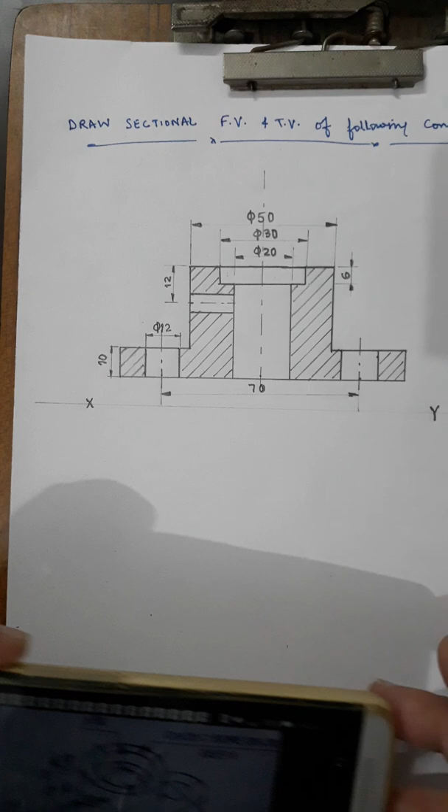Hello friends. Now in this video I will discuss the top view of this component. We have already done the sectional front view, and I have added this line, which will be there in the sectional front view. Now what is in the top view?

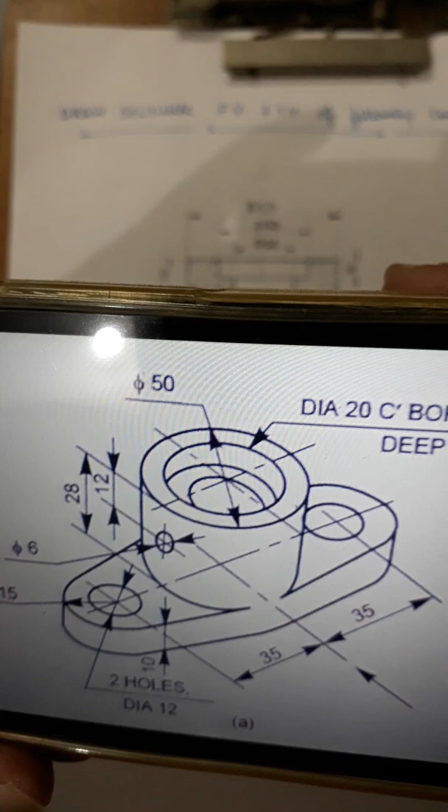You can see this is the component. There are three circles: dia 20, dia 30, and dia 50 at the middle. Two cylindrical holes are there on both sides, that is dia 12, and then radius 15 is outside.

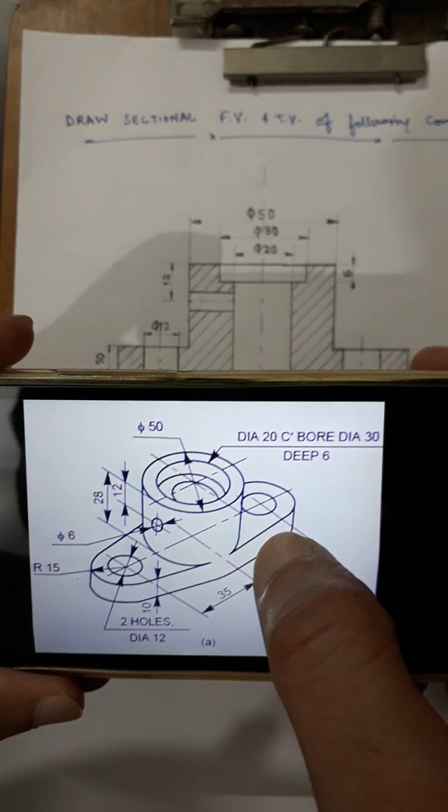Now I will be drawing the top view. First I will find out the center, by extending this chain line from the front view into the top.

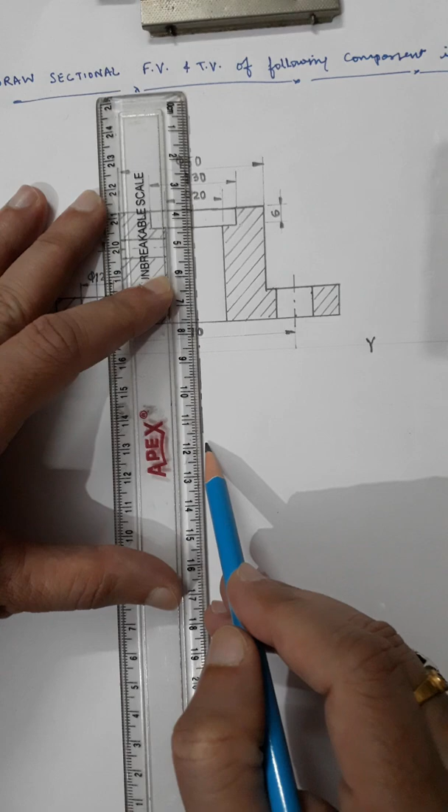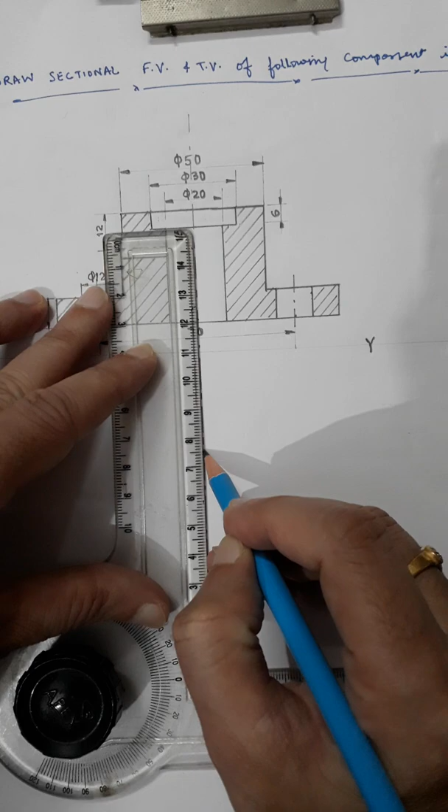Now I will be finding out the center. It is 50 mm, so the biggest circle is 50 mm, meaning 25 from here. You can take any suitable distance from the XY, say 10 mm and then 25 mm. So this is now I will be taking this as center.

Now again I am going to draw the center line, horizontal center line, both sides.

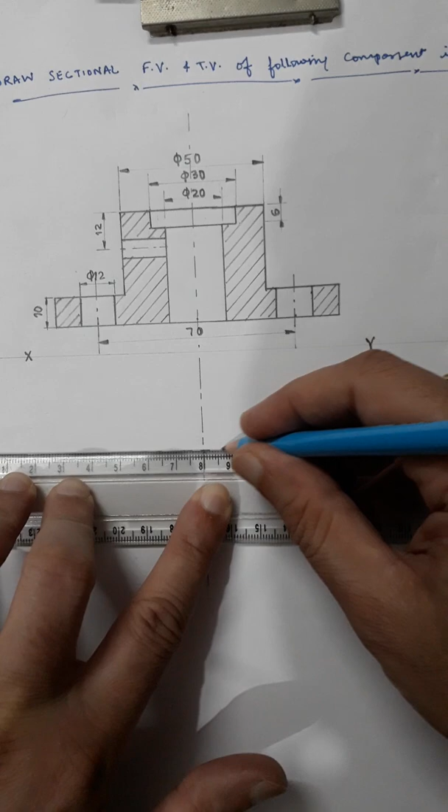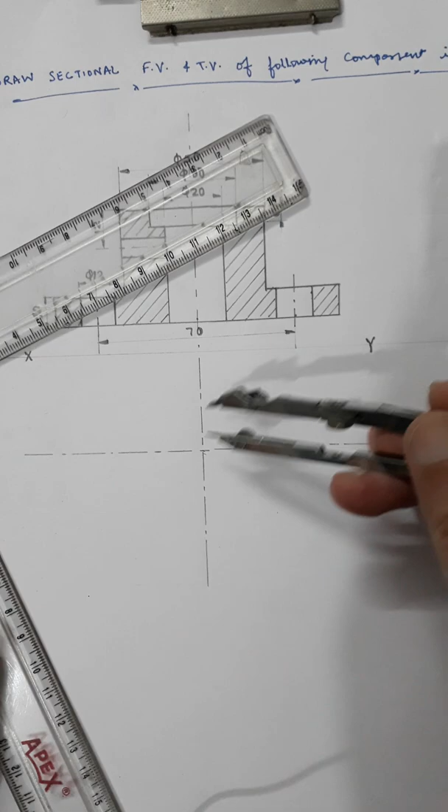Now I'll be drawing three circles: one is dia 20, other is dia 30, and the third one is dia 50. So this is dia 20, I'm going to draw.

And the second one is dia 30. I'm measuring 15 mm. So this will be dia 30.

And the next one is dia 50, meaning radius 25. And this is the outer circle.

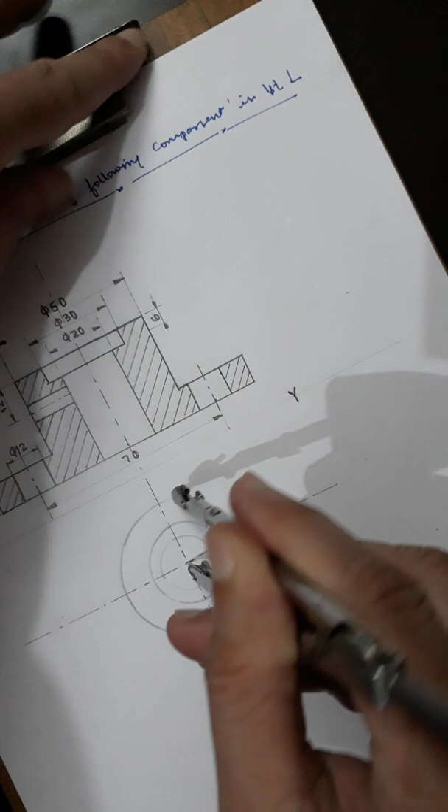Now these are the three circles, dia 20, 30 and 50. Now what is next? Now you can find out here.

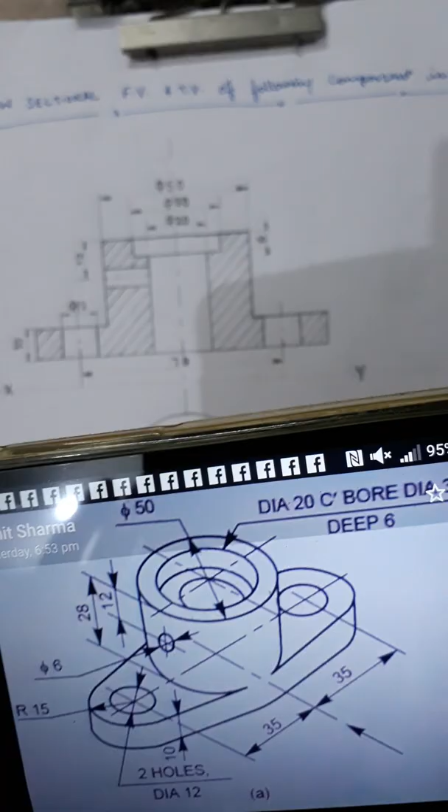So the distance of this center is 35 from the center of this component, 35 both sides. Now I will be drawing the center line first, both sides 35 mm each apart, and then I will be drawing the radius, outside radius. So here it is 35 mm both sides.

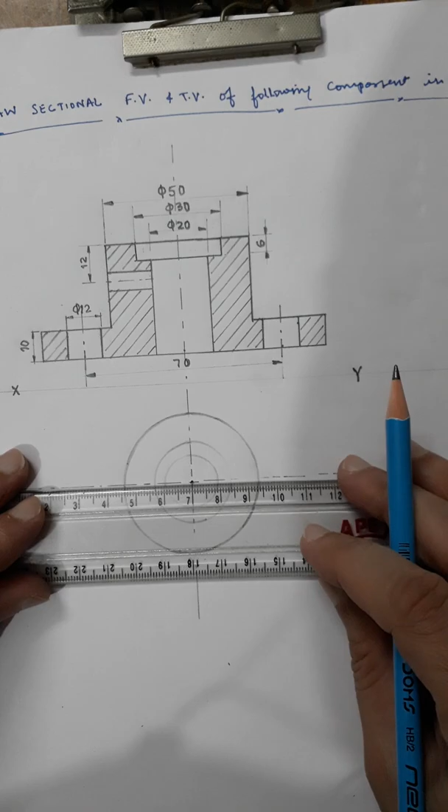I will be just extending it from this front view like here, so this is 35 mm, and it is on the other side as well. I am just extending it from the front view, the same center line.

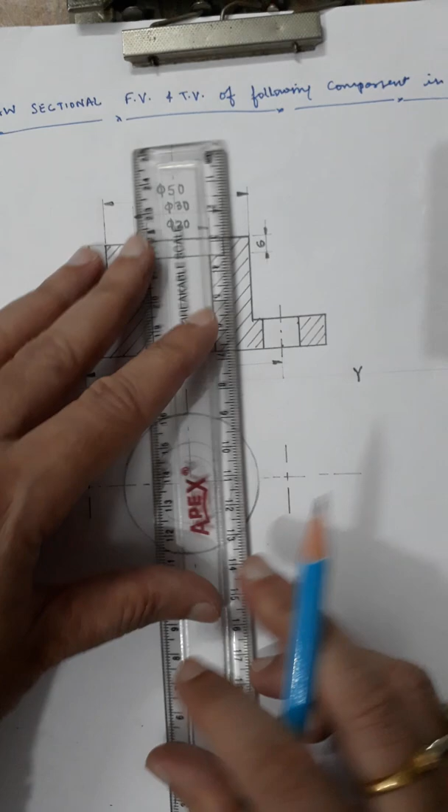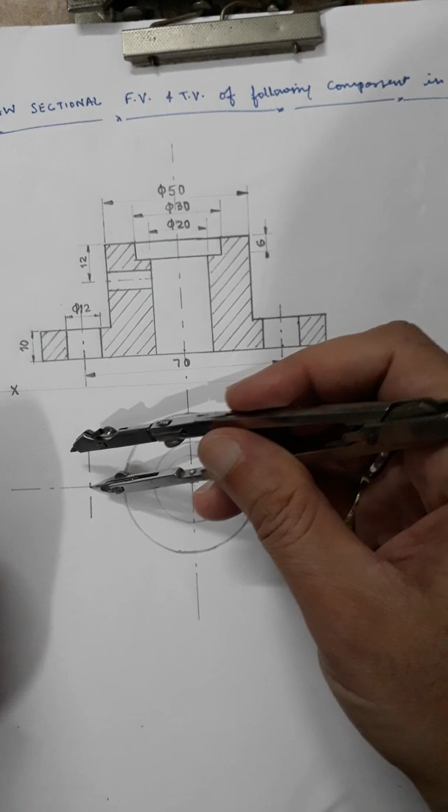Now there are two circles of diameter 12 and one radius is 15. So I'll be measuring 15 mm radius first. So this is 15. So I'll be drawing that radius.

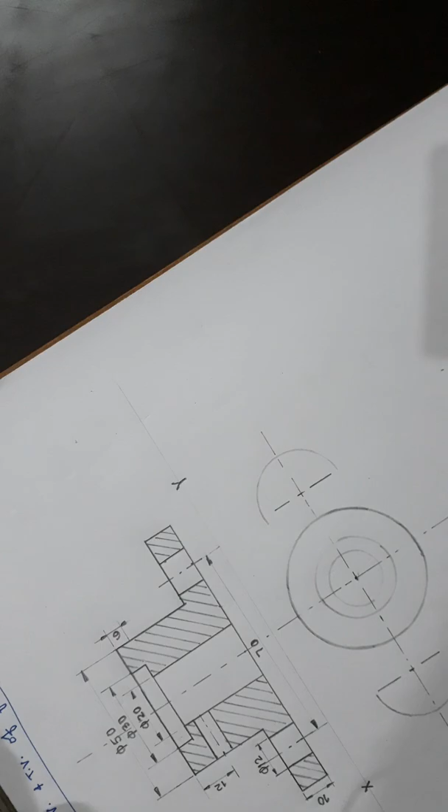Both sides, up to the center line. Now I'll be extending this center line.

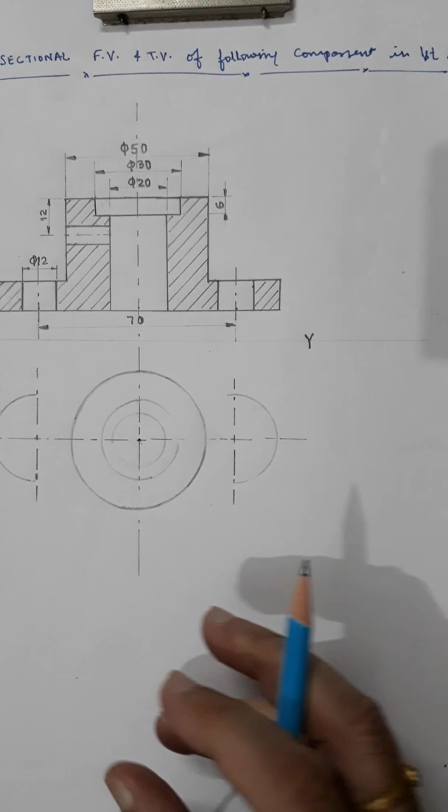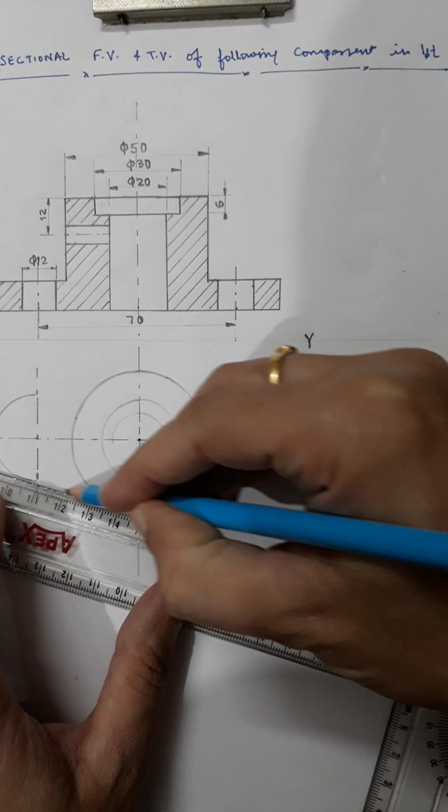Now this is to be joined tangentially. Here you can see in this component it is being joined tangentially, so I'll be drawing two tangents, both sides, and on the upper side as well.

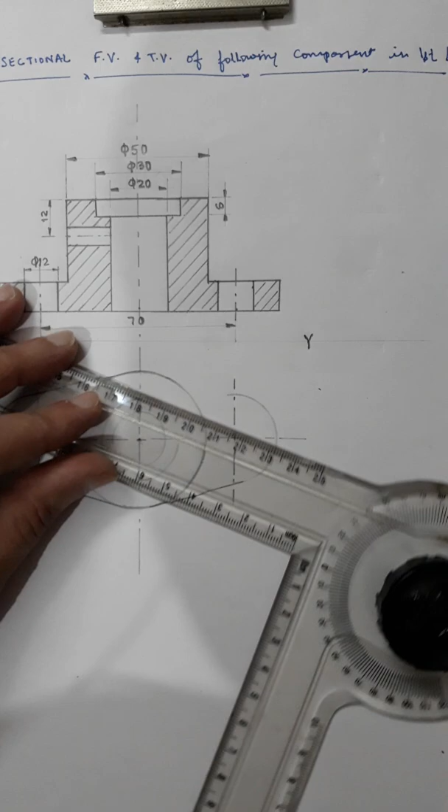Now after this there will be two more circles left, two holes of diameter 12. Here you can see there are two holes on both sides, that is diameter 12, as given.

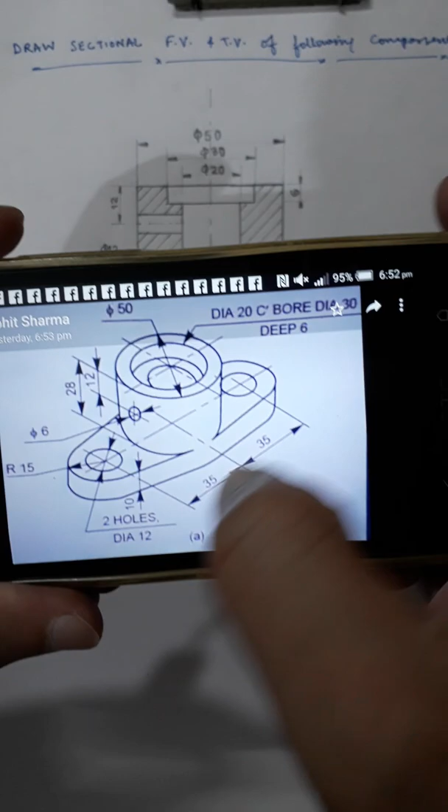Now I'll be drawing these two circles. Diameter 12 means radius 6. I'm measuring radius 6 here, and I'll be drawing two circles, both sides, one circle on this side and other on the right side.

Yes, so now this is complete, this is the complete top view. Now I'll be doing the dimensioning now. Yes, one more thing is left. Here you can see this is a cylindrical hole here in this.

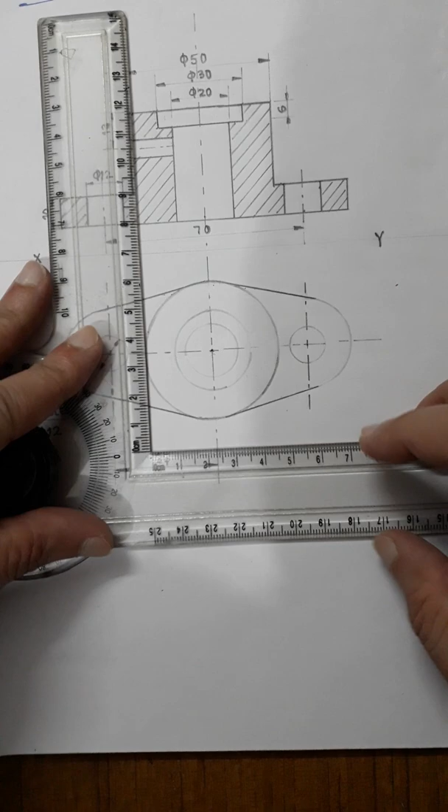Yes, so it will be shown hidden. So I'll be drawing a hidden line, 6 mm, so I'll be measuring 3 mm both sides of this center line, 3 on this side and 3 on the other side. So it will be throughout, up to this point only.

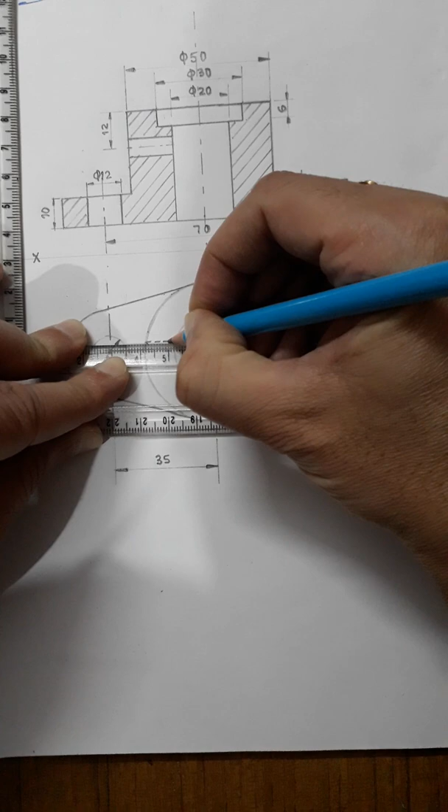So it will be a dash line up to this point. Yes, now it is complete.

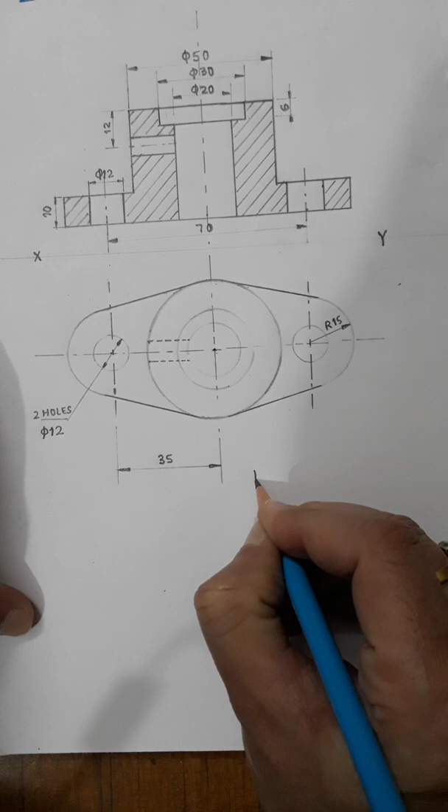You can also write this is the top view and this is the sectional front view. XY is there, sectional front view and top view. I hope you understood it. Thank you very much.